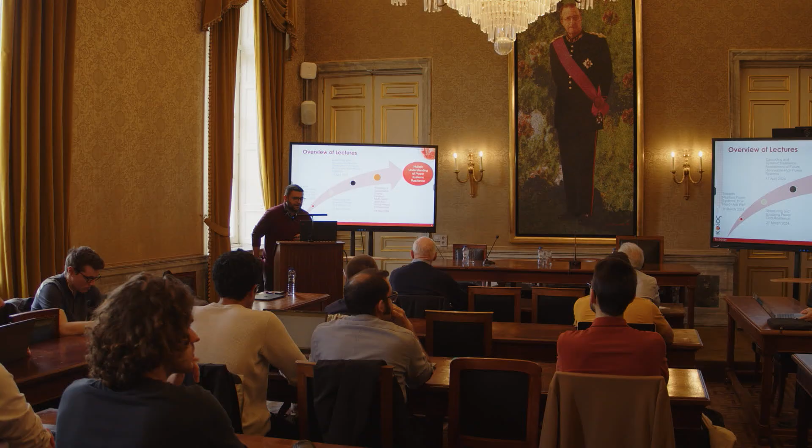So as Pierre said, we already delivered 3 lectures as part of this position. We started from March, where we talked about resilient power systems, then how we measure and enhance power grid resilience, cascading and dynamic studies, and this last lecture will focus on flexibility of sustainable systems. We'll see examples of multi-sector and multi-vector perspectives, and how everything is brought together under joint frameworks to co-optimize different energy vectors and different sectors together.

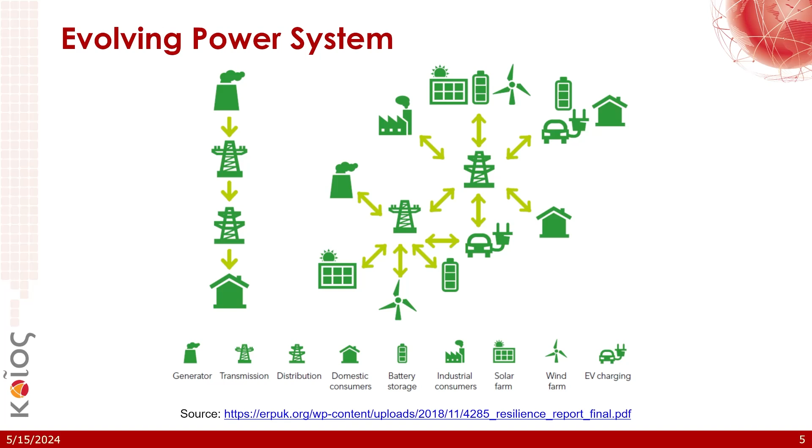So as we all know, the power system is evolving. Starting from the vertical structure that we had, from generation to consumption, now everything is getting more complex with the penetration of electric vehicles and renewable energy sources all over the place. So we see this kind of multi-directional and bi-directional flow in energy systems nowadays, and looking ahead in the future as well, the multi-sector and multi-vector perspective is becoming very important.

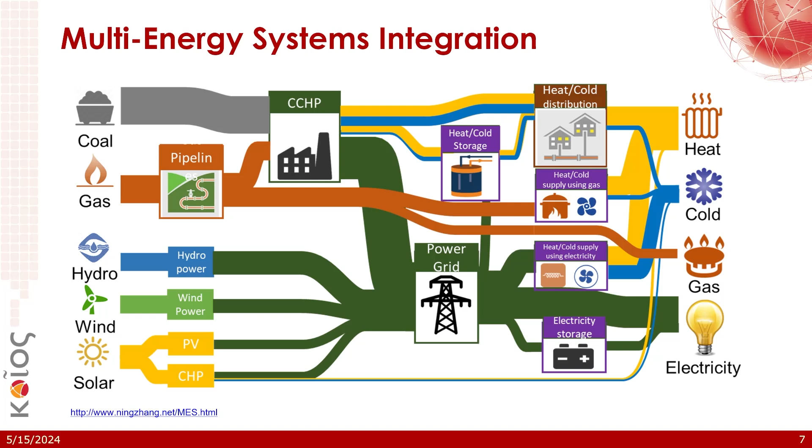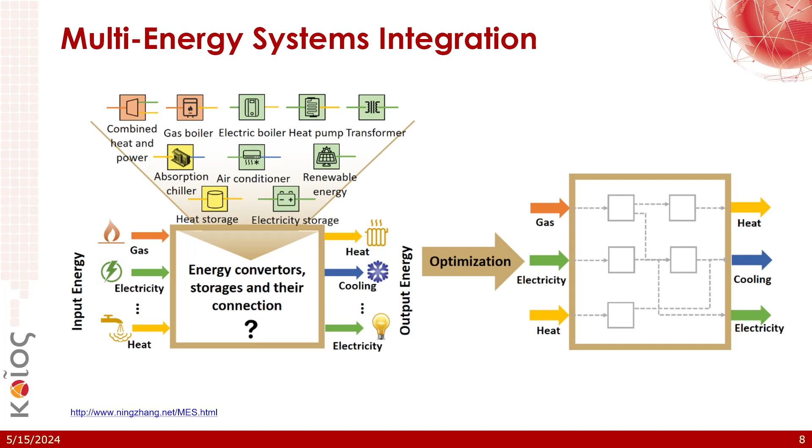So we have different technologies coming into the system. We have gas boilers, electric heat pumps, and so on. And the question is how we bring everything together and co-optimize these technologies and resources in order to provide the services that we need as a society, for example heating, cooling, electricity supply, and so on.

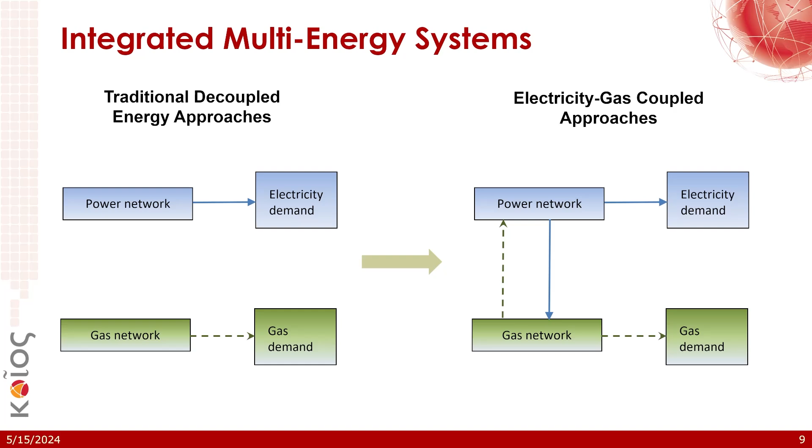Traditionally, we had the power network and the gas network, and those two systems were providing the electricity and gas demand in an independent manner. Now, with coupled approaches, we need to look into the interdependencies and the integration of the two systems together, as we can see in this simple diagram here.

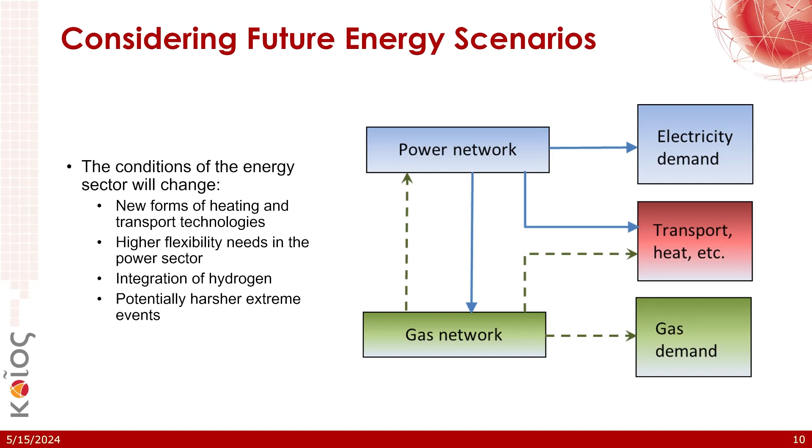And if we start adding more critical sectors, for example transportation and heating, as we consider future energy scenarios, then the whole complexity and integration becomes more and more critical. For example, National Grid in the UK has what they call future energy scenarios, where different energy carriers and low carbon technologies penetrate the system, which will be operated and have to be co-optimized in a holistic manner.

Further to the multi-energy perspective, we also have the multi-sector, and this is just basically an example of a multi-layer analysis where we need to define the coupling points between the critical sectors in order to assess basically their performance, their vulnerabilities in a coherent manner in order to co-optimize their performance in a multi-sector environment.

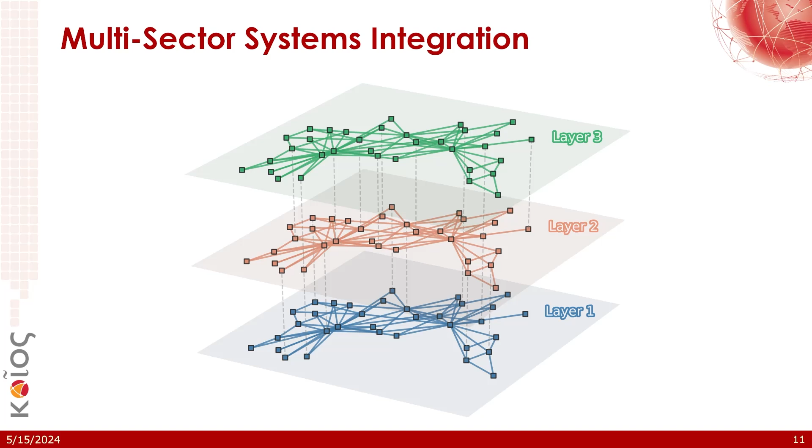When we started the project, the FutureDAMS project, which I will talk about later, we were doing our thing as electrical power engineers, and the water engineers were doing their part from the water side. So basically, as power system engineers, we assumed that we'd have plenty of water to use whenever we want for hydropower generation. And the water engineers from their side were putting their own constraints on the water that the electricity part will have for hydropower generation.

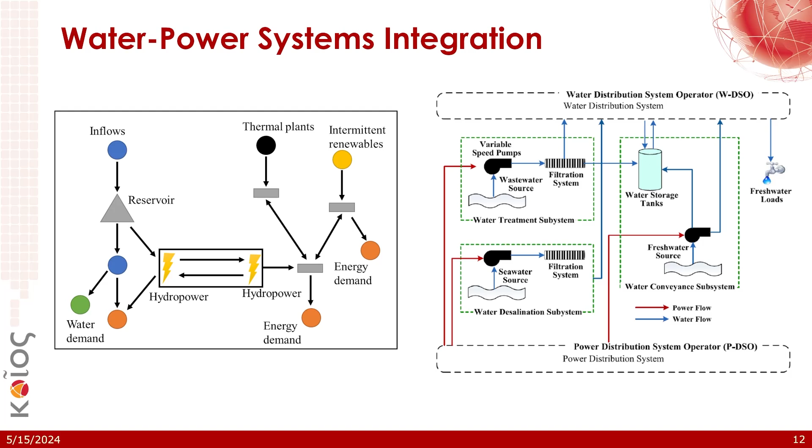So when we were actually trying to merge the two, we realized that it's not that simple. There were many complexities in coupling the tools, from the perspective of modeling each system. They run in different time resolution. For example, we assumed that once we open the valve in the reservoir, the water would go automatically in the generator and start producing electricity. The water engineers told us that's not the case. It takes some time. So that time difference is very important to consider if you want to achieve high accuracy in your results.

So, okay, this is something that we said already. So the first case study that I will talk about is the Manchester campus case study. This is a representation of the new campus of the University of Manchester. We were tasked by the dean of the university to see how we can co-optimize the energy resources we have in the campus. In the campus, the electricity, heat, and gas systems were operating independently. So we had our electricity, heat, and gas demand, and they were supplied in an independent manner.

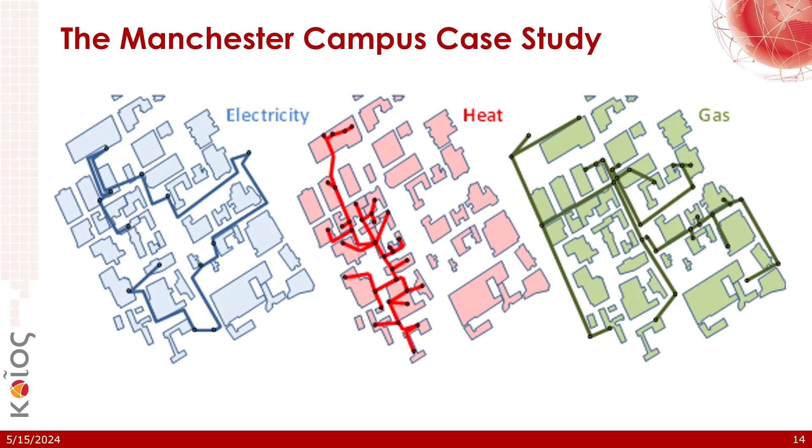So we were tasked to see how we can run this within a multi-energy environment and how we can achieve some savings in terms of some key indicators they gave us, which are basically the CO2 emissions, the cost reduction in energy consumption, and so on. So in a nutshell, the district of the university is comprised of 26 buildings owned by the university. Some of those buildings are connected to the same electricity distribution network, district heating network and gas network, but most were not.

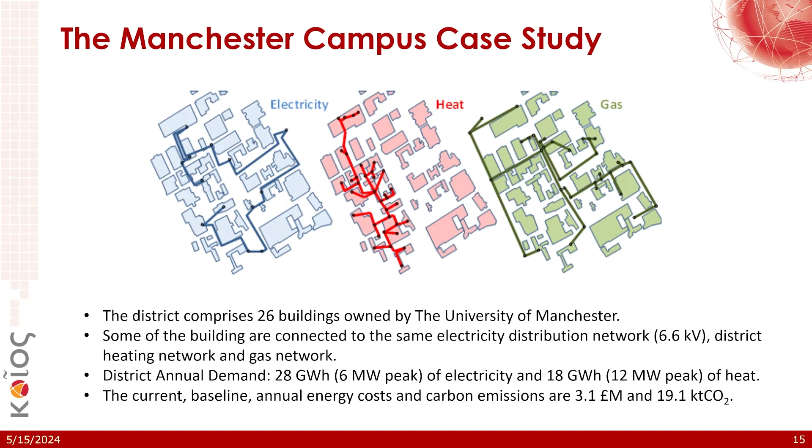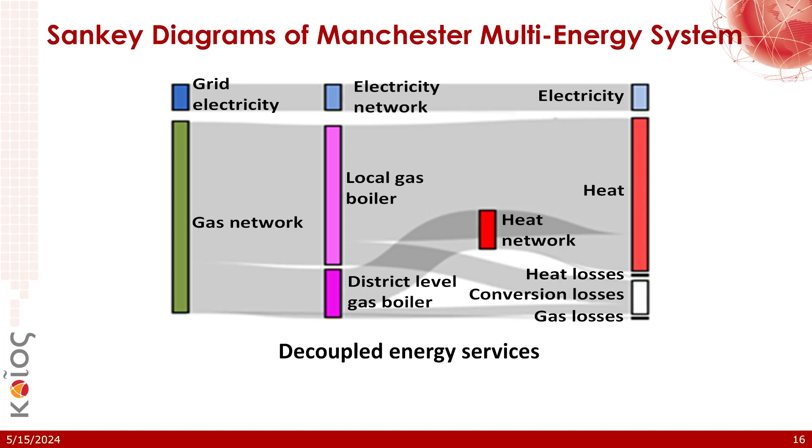These are just some characteristics about the district demand of electricity and heat. And we were given a baseline of the energy cost and carbon emissions to use as a benchmark within our analysis. So what we did first was the decoupled energy services. We looked at how the system behaves if we look at the electricity system and gas network independently to provide the services in the campus in terms of electricity and heat consumption. Then we simulated the boilers, both at the local and district level, to see their efficiency, and added the heat network, the heat losses, and so on under a common framework.

Then we started mixing things a bit. We started considering the ambient heat and how we can utilize that to operate our heat pumps, again at a local and district level. And afterwards we put the gas network into the simulation as well as a common framework. We then noticed that we can reduce a lot the grid electricity consumption. We can utilize more the gas supplies that we had, which is a cheaper option, at least in the UK, because gas is one of their primary electricity supplies.

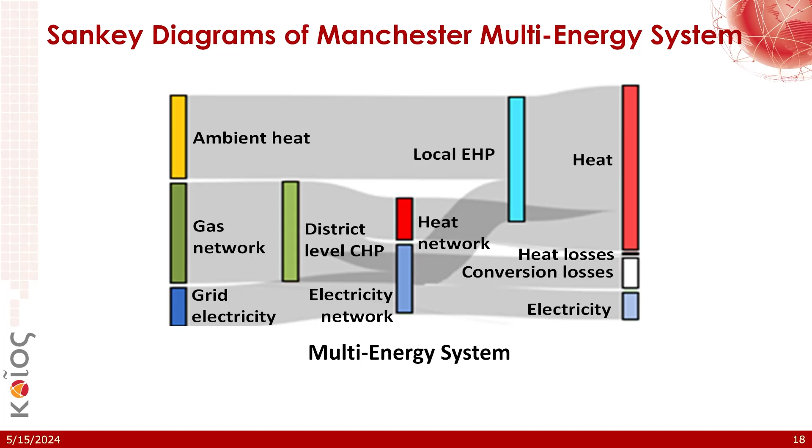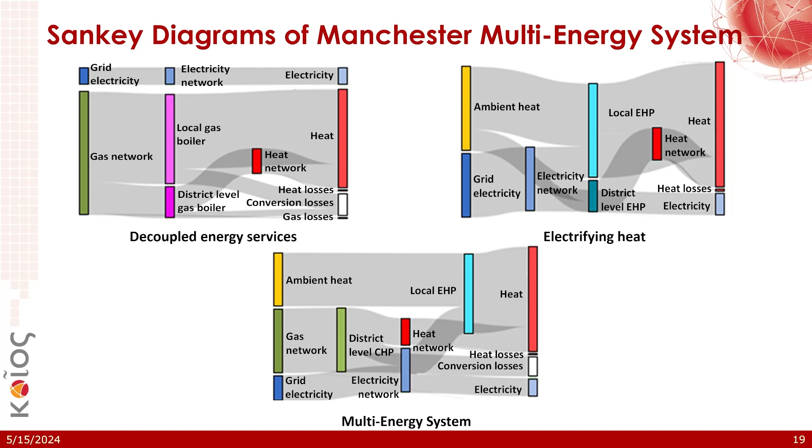And then we saw with these Sankey diagrams how, moving from the decoupled energy services into a multi-energy perspective, we can co-optimize and co-utilize the heat, gas and electricity vectors. Afterwards, we defined different scenarios, starting from the baseline, then moving into a conservative scenario where we kept the boilers steady. And then we tried to increase the PV, the electricity heat pumps, and the combined heat and power that we had in the system under 4 different scenarios.

We had the baseline, a conservative, a modest, and an extreme penetration of these low-carbon technologies. These scenarios were developed with the technical services from the university to see what is actually possible to do with the infrastructure we had in Manchester. So you see that we put a lot of PV as well, which was a bit funny to do in Manchester, considering the cloudy weather, but it actually worked.

So in this table here, we can see different indicators. We have the annual economic savings, the annual carbon savings, the peak demand reduction, and the electricity demand reduction. So this is the business as usual: continue operating the system as it was, but with these technologies for the different scenarios. But also what we did, we applied some smart control.

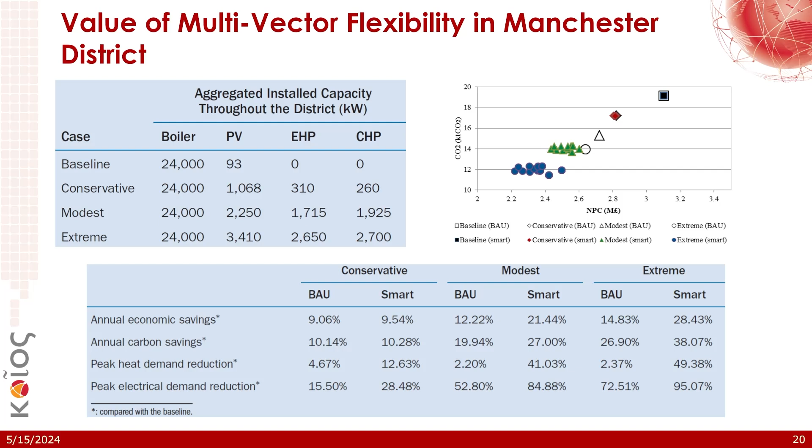So taking a closer look at this diagram, here we have the CO2 emissions and we have the cost in the x-axis. And here we see that even though with the extreme scenario the cost of investment is higher, the annual savings on the electricity and the heat consumption actually counterbalance the initial investment that you put in your assets. So although the extreme scenario was requesting more investment, if we consider the net present cost, it's actually not that expensive, over a long period of time, to return the investment that you put forward for the assets.

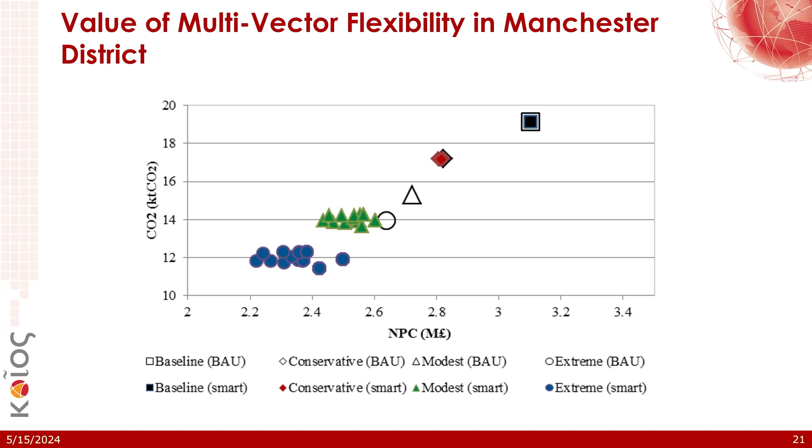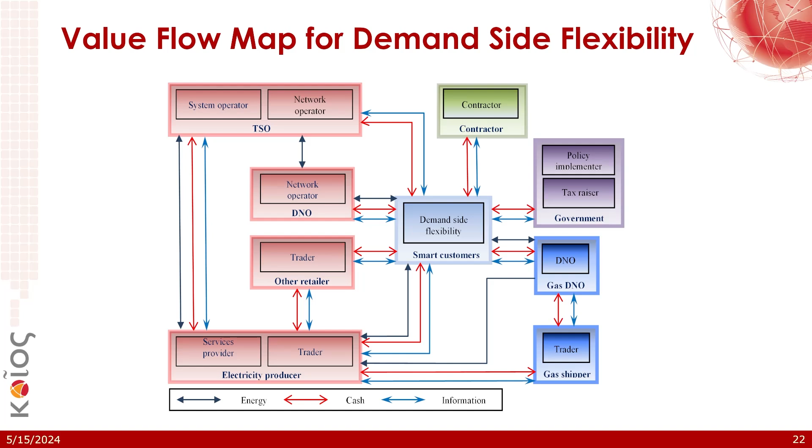So this is an example of a sort of multi-energy integration. So talking a bit about resilience, so Pierre will not have a complaint that we left resilience out.

In a piece of work that we did with some colleagues recently, we took this resilience trapezoid that we had in a previous publication of ours from 2017, which has three phases: we have a disturbance here, and then the progress of the disturbance, which reduces the performance of the network, whatever the network is. We have this period where you are trying to coordinate your emergency actions, and then we have the restoration of the system back to its initial state, or there are some discussions that after a disturbance you can go into a better and more secure state with the appropriate actions.

So the question that we asked with some colleagues in a publication we had last year is how a disturbance from one energy vector can escalate or propagate to another. So we created this conceptual framework where we had the resilience trapezoid for the electricity network, heating network, as well as gas network. And then we came up with a conceptual framework to see how, as I mentioned, a failure can propagate from one energy sector to another.

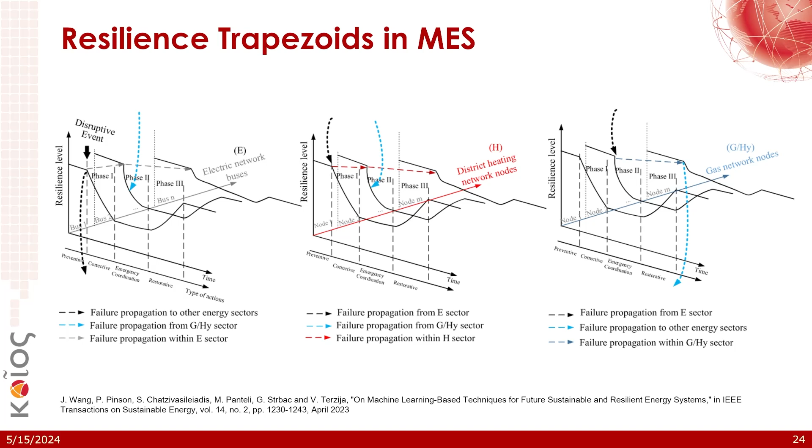The trapezoid, I'm very much aware that it's not really a trapezoid. When we first worked on this, what I wanted to achieve is to have a simple way of showing what might happen when you have a disturbance. When you look into real data, first of all, this period is not that long, but I wanted to have a nice shape to be explanatory.

What we do in different projects, you are very correct. When you want to do dynamic studies, for example dynamic stability, you have the drop, and then you immediately go back to service, as you said, with batteries, with quick injection of energy, you can recover much faster. We do that, and that was a topic of the previous lecture, but I can share the slides. Yeah. Thank you.

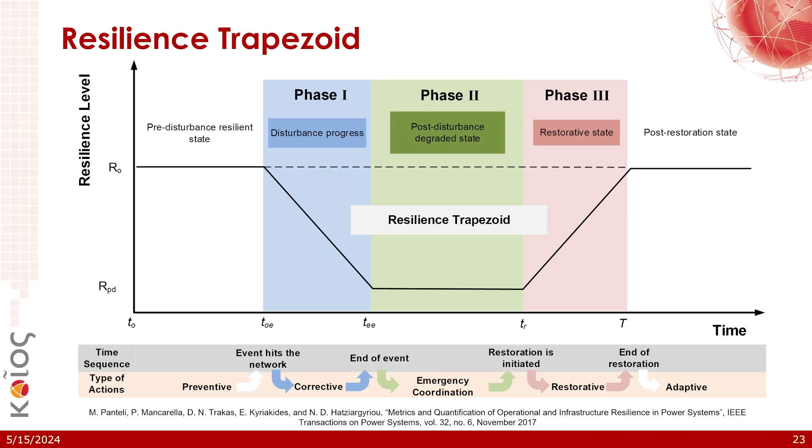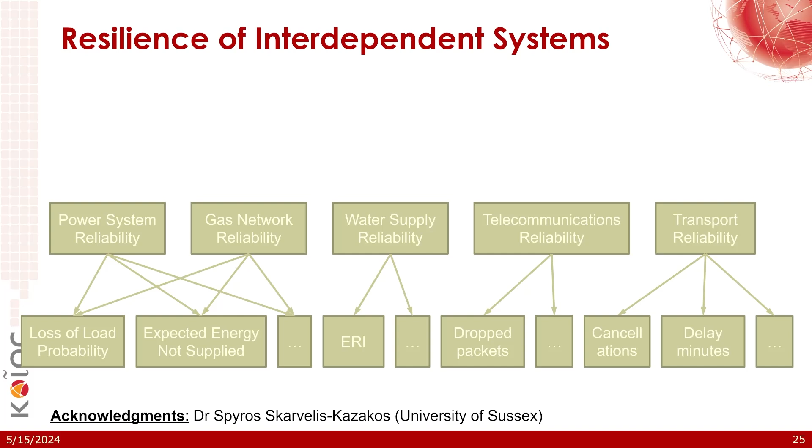So, on this topic, when we're talking about resilience of interdependent systems, we have all the suppliers, and as we're saying with Hakan now, we have different metrics as well that different networks are using. So when you are adding resilience as well in the picture, we need to define power and gas metrics, water metrics, transportation, telecommunication metrics, and the question there is how you can actually try to compare or to come up with a common metric system that will be acceptable from the respective operators and regulatory authorities.

In the UK, that I'm still working a lot with, we have discussions with Ofgem and with Ofwat, which are basically the electricity and gas and water regulators. And we had also IGEM, the Institution of Gas Engineers and Managers, and National Grid as well, where we're trying to build the electricity and gas equivalent network of the UK and try to expose that network to different kinds of disturbances, which was basically inspired from the unfortunate example of Texas. And they were worried that if a big gas disturbance happened in the UK, what would happen in the electricity sector?

And also with the water system, Ofwat were very interested to see how the water consumption of big thermal power plants will change under the impact of climate change, and looking into climate resilience, how much water the electricity sector will need, and how much the water licenses that the electricity authority will have to pay will change as a function of the water scarcity that is expected as an impact of climate change.

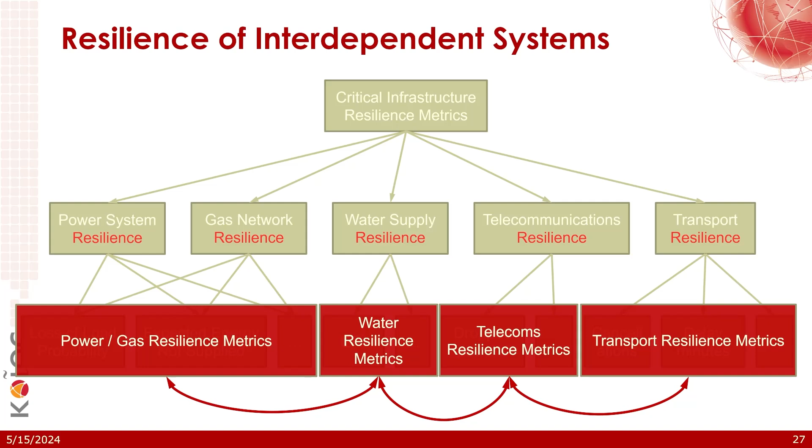So looking into this kind of interdependent side of critical infrastructures, in Manchester we started this FutureDAMS project in 2018, which was looking into the design assessment of water, energy, food, environment megasystems.

So there is a video. There is sound as well. Good. So I will let the video explain what the project is.

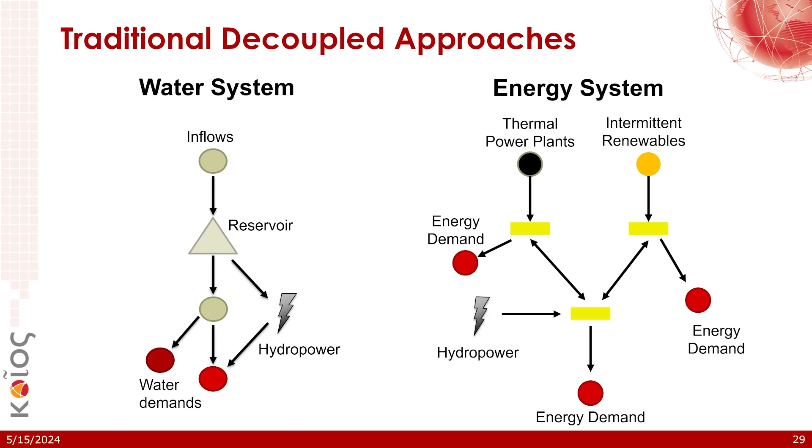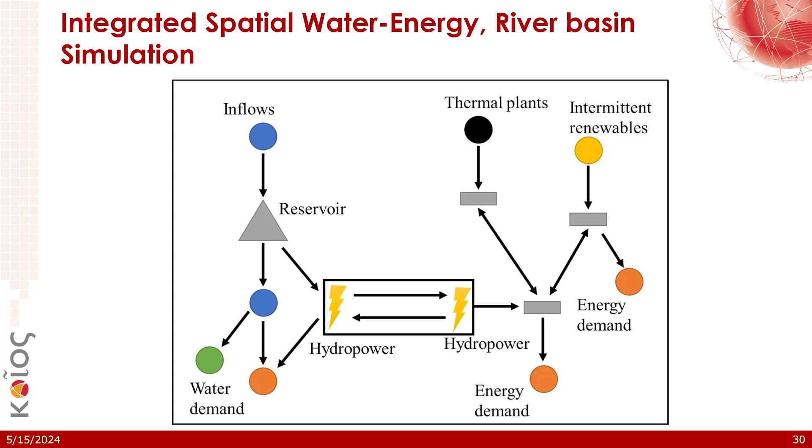So as I said earlier, within the project we had water, power, and environmental engineers as well. The water engineers were just operating the river basin models that they had in their own manner, and they were doing a simple transportation model to see how much hydropower can be generated. And from our side as well, we started by utilizing all the water that we had on the rivers in these countries to generate hydropower. But the two are actually connected. And we tried to see how we can bring together the water and the energy modeling into a single platform.

So in this project, we had our energy model and our water model, which are openly and publicly available on GitHub, Pywr. And we also developed a communication engine, Pynsim, which was responsible for linking the two engines together. And then we had different water inputs, water energy, weather data, modeling settings, and we also had the generation cooling, which was requiring some water from the river basin to operate.

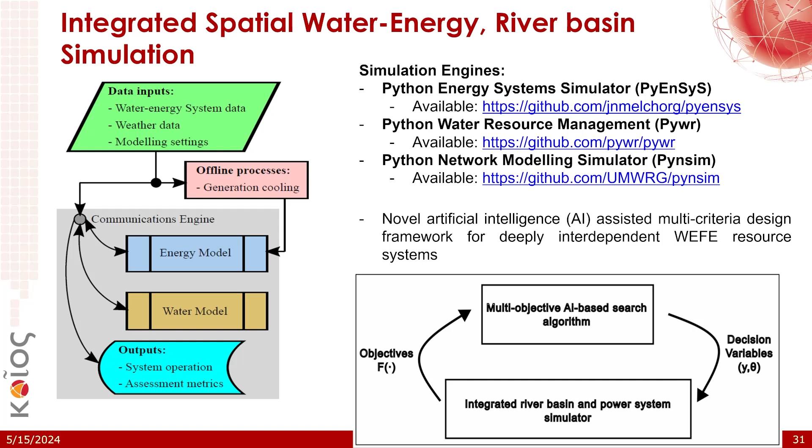So we brought all this together under an AI model for a multi-criterion design framework, looking at WEFE, water, energy, food, environment resource systems, in order to see how the different trade-offs work between the critical infrastructures. So this is how it works. First we're doing the water power network simulation.

So we're having the systems modeled together. So we started with a bit of soft coupling. So the water team was modeling the water system, we were modeling our energy system, and then we had this kind of soft coupling and soft communication between the two models. Then we had one platform, one model for running both together with the spatial and temporal resolution that we're defining.

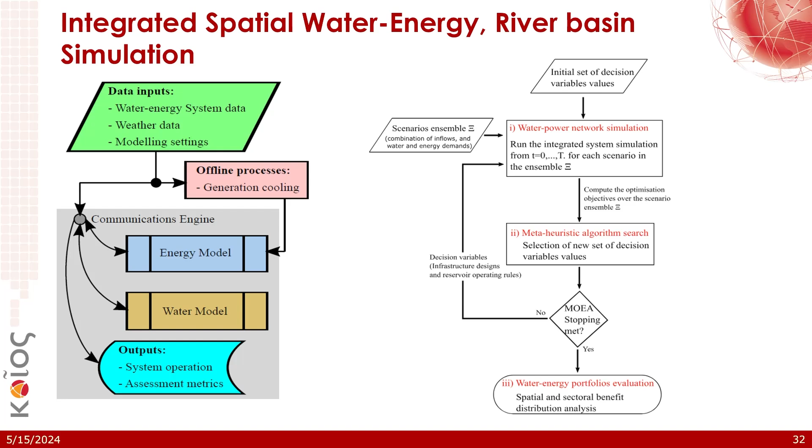And then as a first approach, we used metaheuristics to select the variables, and then this was continued until we reached the water-energy portfolios evaluation, achieving spatial and sectoral benefits for both systems. Okay, this is just a simple system which I will skip, for the sake of time, to go to the nice example that we did for Ghana.

So for Ghana, we had the water and the power utilities as partners within the project. So they gave us some tasks in order to achieve large-scale development and penetration of renewables in the system, supported by the Akosombo Dam, which is in the south of the country, which is the largest installed generation plant with a capacity of about 1 gigawatt.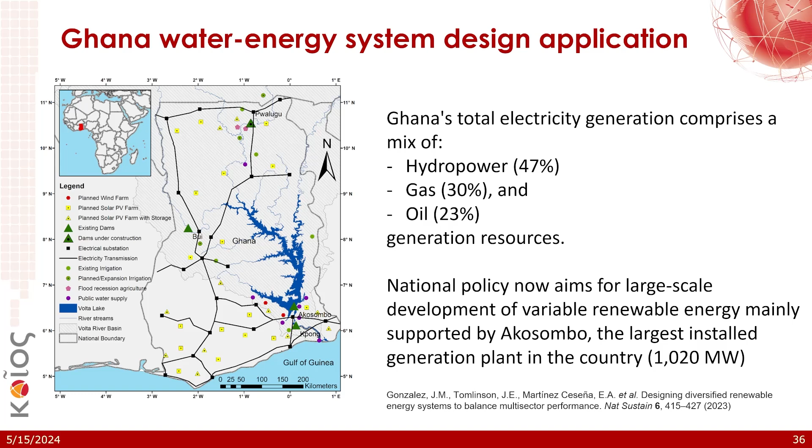So the generation portfolio of the country was something like this: about 50% hydro, 30% gas, 23% oil. And then we tried to see how we can penetrate more and more renewables into the system. So this is the equivalent network we built for Ghana, which is currently being utilized by the utilities there, where you can see wind farms, solar, dams, electricity, water system, and so on, everything in one model.

So looking into the design challenges that we had, we needed to meet the future energy demands of the country as it was evolving, reduce the emissions, minimize the hydroecological disruption, and no new dams. Which meant that we needed to rethink the way that they were operating their hydropower in the country.

And the no new dams constraint was because, as Khadija does, in optimization, the portfolio might say, okay, build a new dam. But a new dam, as we realized very soon in the project, is not a simple case, because a new hydropower station has a lot of environmental impacts. So we had different objectives to minimize, and those objectives were spanning across different sectors.

The decision variables we had were adding more renewables, solar, wind, and also biogas as dispatchable renewable generation, which they had plenty of resources for in the country, building new transmission, and, as I said, rethinking the reservoir operation. And then we had different intervention scenarios: just updating the operating rules of hydropower, updating the rules plus transmission line expansion, and then plus adding some bioenergy in the country.

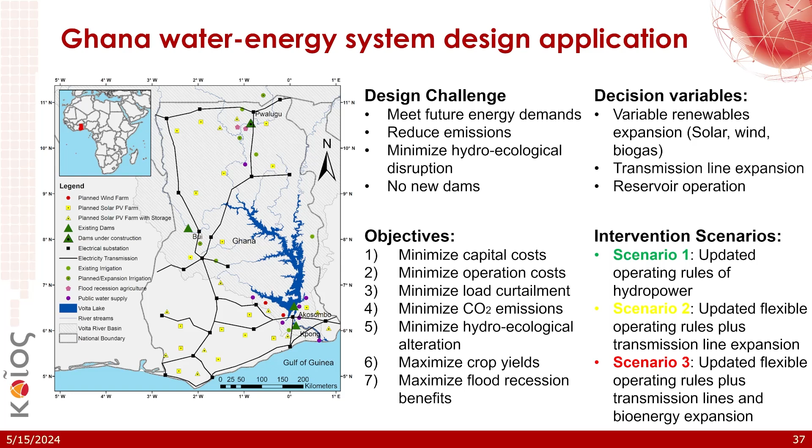It's not a mathematical thing. Yeah, and I will talk about the trade-off issue. I will address it later, yes.

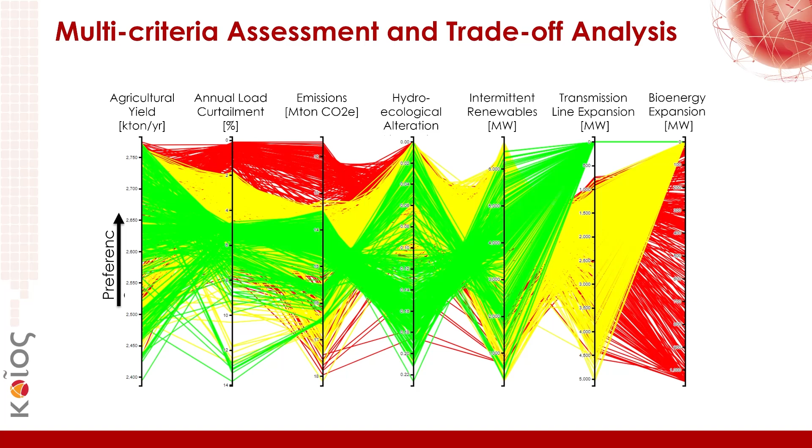So what we did in the first meeting we had with the Ghanaian authorities, as academics, we went there and we said this is the optimal solution for the country. And then because there were different kinds of engineers and authorities in the room, they told us, okay, what if you consider the crop yield? What if you consider, as Juan said, the impact of hydro-ecological alteration and so on? So it was difficult, using these objectives and these decision variables, to actually come up with one portfolio.

So what we did, we defined hundreds of portfolios, where each line actually represents an investment portfolio for Ghana. So we used this kind of parallel plot diagram for the utilities of the country. And for each scenario, we have this metric and we're showing how it behaves and how it affects the different sectors in the country.

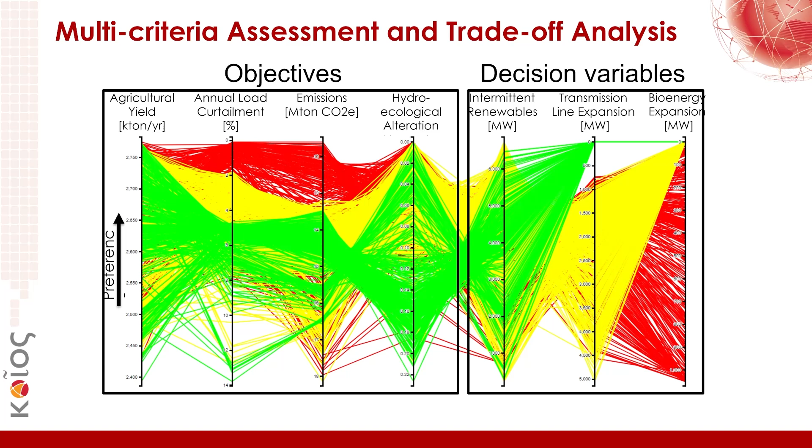So once you do that, as we've seen in the video earlier, and you start putting filters on how much, for example, transmission line expansion you want, or can afford, or can build because of environmental reasons, then you can start seeing how the different metrics behave. So if, let's say, we put a filter there that we don't want any transmission line expansion, then we can see that the hydro was just supporting the base load.

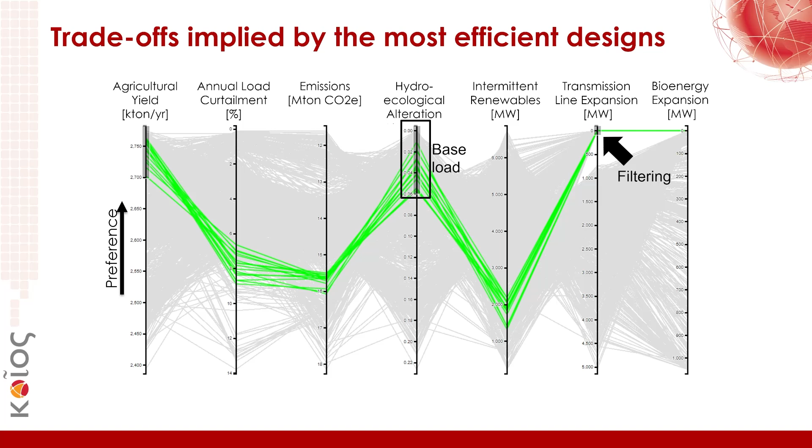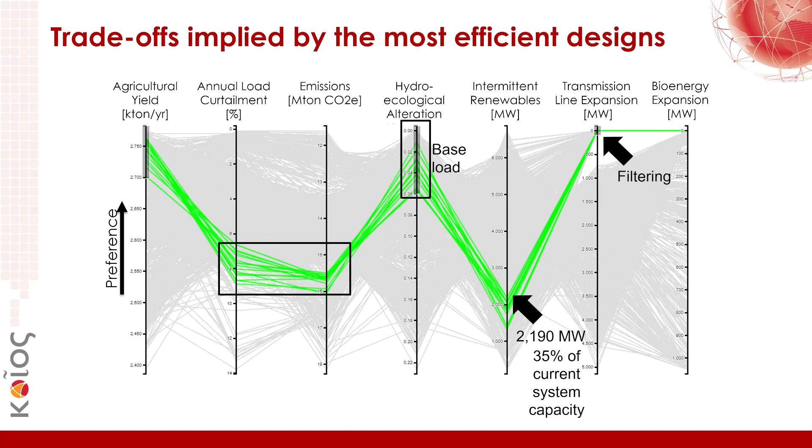The renewables penetration was reduced, because the higher we go in this diagram, as we said, is the preference. So the higher we are, the better. And we're also not doing very well in terms of load curtailment and emissions in the country. If you do hydro peaking, so hydro peaking is basically not just operating your hydro generation for base load, but you actually do the balancing for renewables.

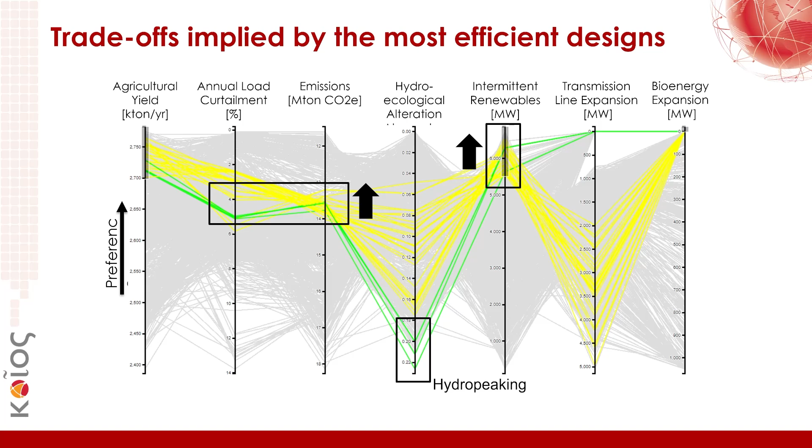We can see that the renewables are increasing a lot, but when you do the hydro peaking, you have a big impact on your hydro, on your water metrics. So you actually have a lot of impact on your water consumption, but because of the penetration of new renewables, the emissions are improved, and the load curtailment is improved as well.

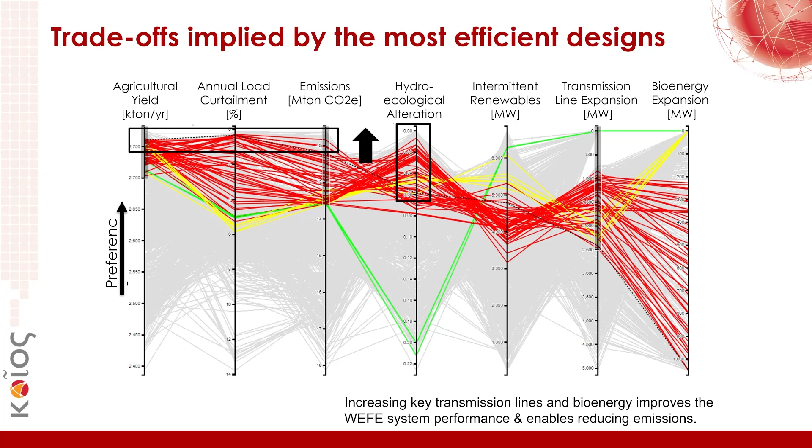Then you start playing with different filters here. So for example, if you build a new transmission network, then you reduce the environmental impact here, and you also optimize in a way the metrics for the other sectors as well.

So to provide, let's say, a solution for the country, because we were asked to provide a solution, we came up with what we called a compromise solution, not an optimal solution, but a compromise between the different sectors that we had in the country. So what we see here is the portfolio for the compromise solution, which was building some new transmission corridors between the different regions of the country.

And then we have how different energy technologies will penetrate in the country, from solar PV, some storage, wind, biogas, and also the transmission system. So this compromise solution achieves low cross-region transmission expansion and higher expansion in the southern part of the country, because the big hydropower stations are in the south, to achieve the hydro peaking and balancing, and also higher biogas penetration in the north where the resources were more available.

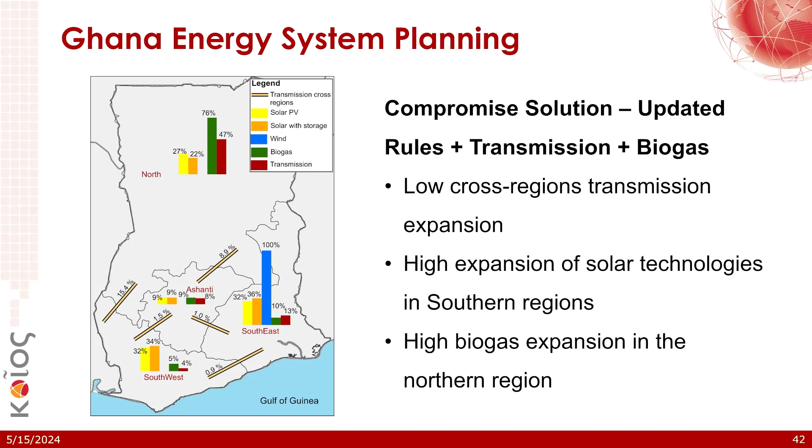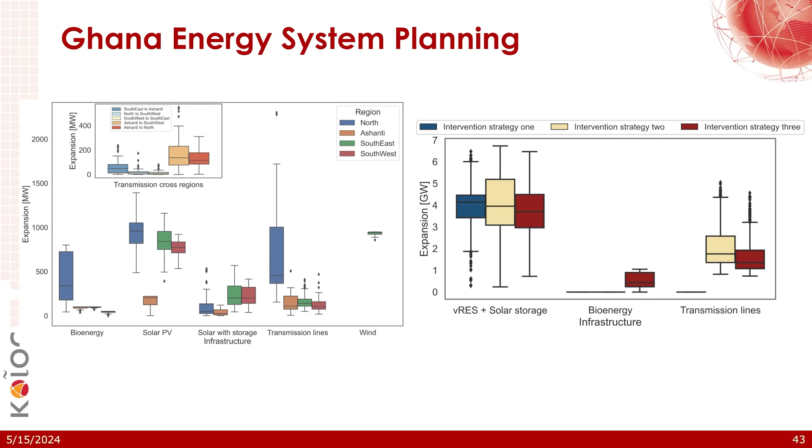And these diagrams show with box plots how the different technologies penetrate in the different regions. And actually these results informed the strategic energy plan of Ghana, looking 10 and 20 years ahead for their strategic energy design. Okay, these are just some other results.

So the other case study we had was for the Nile Basin, as we said earlier. So we built, as you can see here, the integrated water-energy network of the whole Nile Basin. We have this model, and this work was published recently in Nature Water. I think it was last month. So it's a very nice piece of work, and I think the model is already available on GitHub to be used.

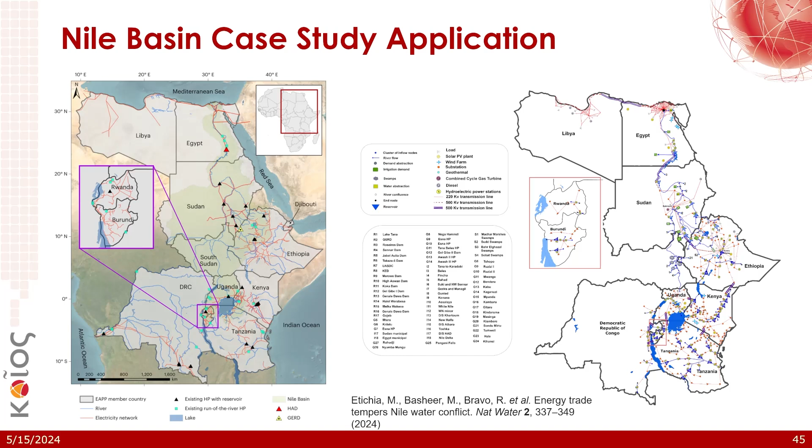So we simulated all the energy and water systems from Tanzania all the way up to Egypt. So it has all the technologies, both from the water and the energy side, in one common simulation model. So as the colleague just said, how trading works in these complex systems is pretty much a political topic. So what we addressed in this paper, there was this new dam built in Ethiopia, the GERD, the Grand Ethiopian Renaissance Dam. Yes, thank you again.

So basically, there was what they called the Washington Draft Proposal that allowed trading only between Ethiopia and Sudan from that new dam, and no trading between Ethiopia and Egypt. When we went into forums with all the system operators and ministries about this matter, their concern, of course, was if you use a lot of water upstream in Ethiopia, how it affects the water flow downstream in Egypt.

And there was a lot of heat in those meetings. So we tried to see if energy trading can actually help solve these kinds of river basin conflicts, in order to share the benefits of that big dam across the countries on the Nile Basin.

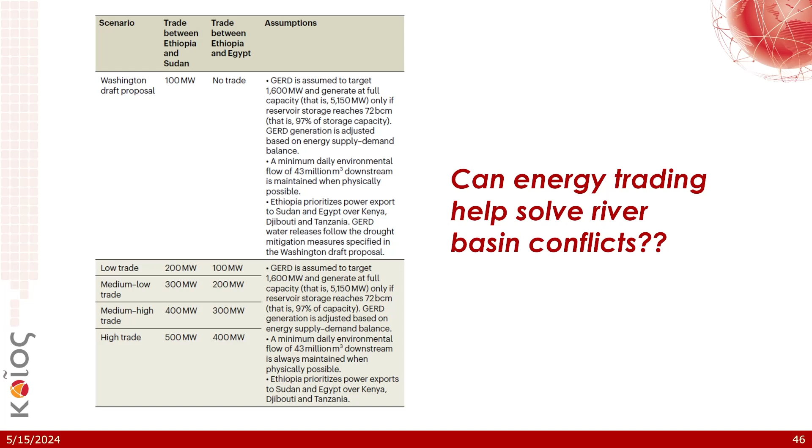So we defined different scenarios here. We had the low trade, medium to low, medium high, and high trade, increasing by 100 megawatts each trading scenario compared to the Washington Draft Proposal. The Washington Draft Proposal was something coming from the United States to propose how the GERD water releases should be used. So we took that Washington Draft Proposal and increased it gradually by 100 megawatts, as you can see here, starting with 100 megawatts, 200, 300, and so on, to see how this affects the energy trading and the water resources in the region.

We tried to see under different trading scenarios how the energy and the water resources and deficits change for the countries. So we tried to give a kind of proof of concept, if you like: if you use in different ways the new dam that was built in Ethiopia, how that affects the resilient performance of both water and electricity systems for these big countries of the region.

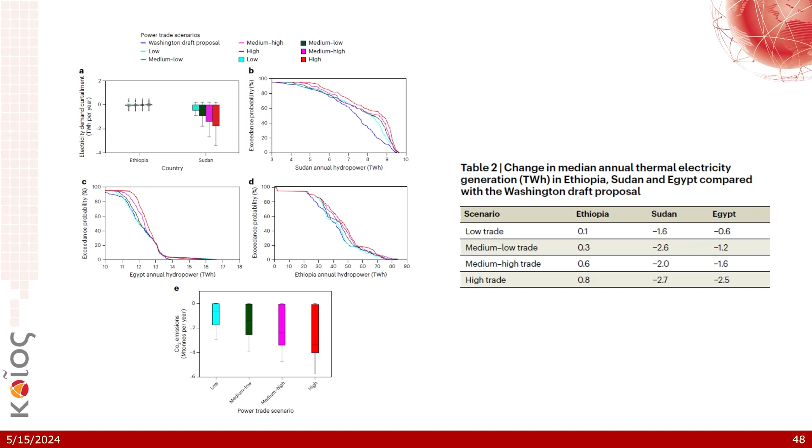What we also did, because coupling the water and energy systems is quite complex and depends on many assumptions, we tried to see how those modeling assumptions can affect the performance of the model. So we considered different sensitivities to water availability, RES integration, power network stress, temperatures, as well as including or not including different factors in our model. By different factors, we mean if we have unit commitment for the power system, if we have the losses, if we have the hydraulic routing of the water system, which affects a lot the performance of the power system itself, and so on.

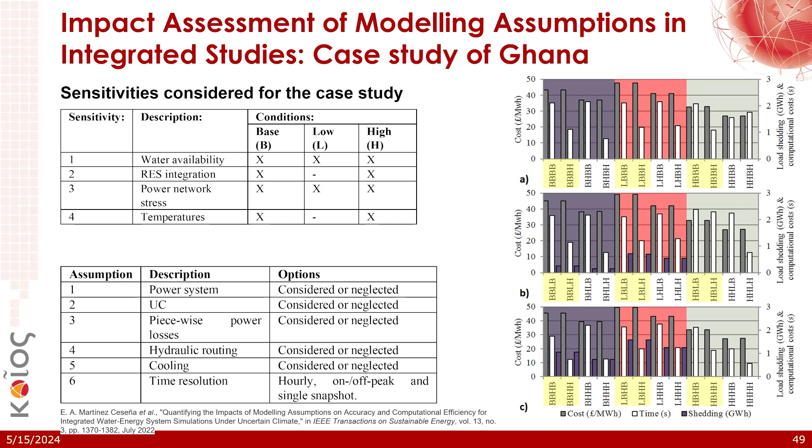And then we came up with different metrics for the cost of electricity and water consumption, as well as reliability metrics for load shedding and computational cost under the different assumptions that we had. So we tested our models thoroughly under different modeling assumptions for both systems.

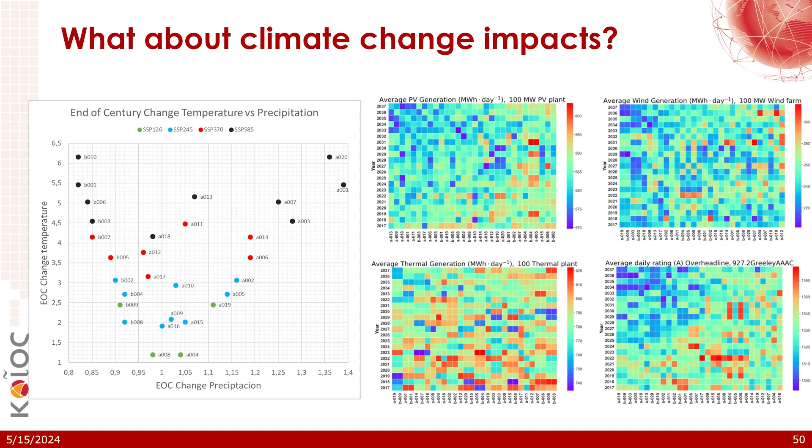And the overhead system is very important because, I'm sure some of the colleagues here might be from those regions, the temperatures can get very high. When I visited the Emirates, it was in August, which was a very poor decision, to visit Dubai and Abu Dhabi in August. You could see the transmission lines actually sagged very much, getting down to the distribution level height. So we quantified the impact of climate change, different temperatures, water availability, and so on, on the resilient performance of PV, wind, thermal, and overhead line ratings.

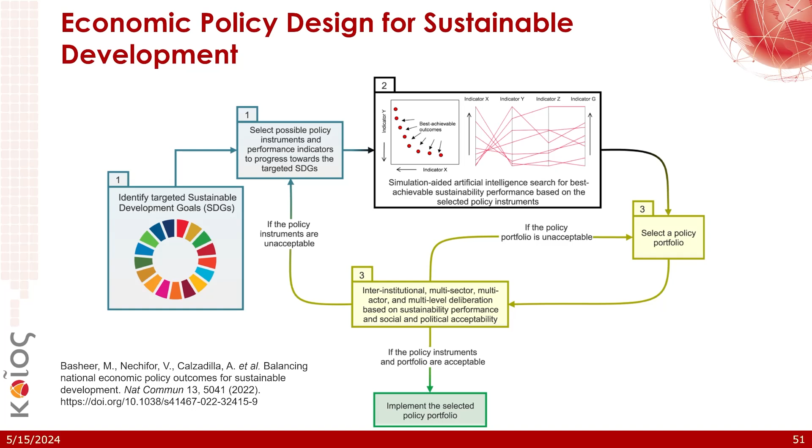And what some other colleagues did in the project, which I was not involved directly in, is to develop what we call the economic policy for sustainable development. They identified the sustainable development goals for the different countries, and then tried to see how the different policies they have in place can interact within this multi-sector and multi-actor environment of river basin infrastructures in Africa. This is a very nice article in Nature Communications, if you're more interested in the policy aspect of this work.

And of course, if you want to learn more, you can visit the website, where you can see different articles, position papers, as well as different training platforms that we used for the African partners.

How am I doing with time, Pierre?

Very good. Okay, so. Can I ask a quick question about the GERD study that you did? Yes. So what was actually the effect of the increased trades on the water volumes that could be released? Because at least from what I understand, the concern is that not enough water will be released downstream, and that somewhat the increase in trades facilitated that also more water was actually released.

Yeah. So what we noticed is that the water deficit, of course, was increasing, not dramatically, but it was increasing, which Egypt was not very happy about. But if you consider the energy trading, my argument to that is that there is no market yet in the region. I think, if I'm not mistaken, there is a market in the Southern Africa part, a power pool, as they call it, but not in the East Africa power pool. So in order to do this kind of energy trading, you need a market. You need to give a price to what you are trading.

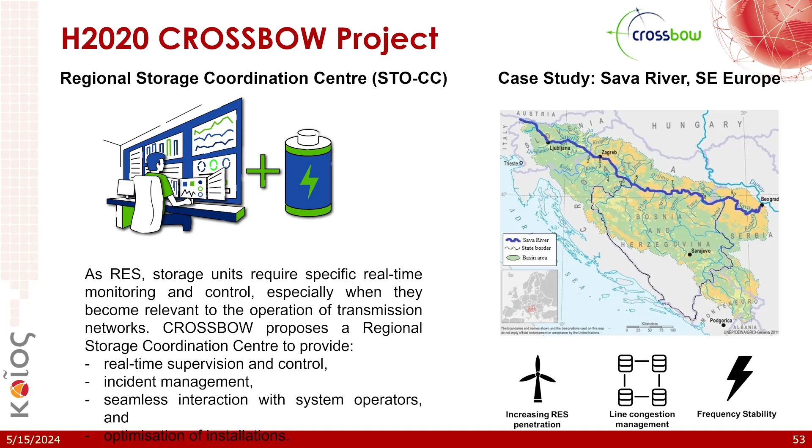Okay, so very briefly, some relevant work about this kind of hydropower optimization is work we did for the Crossbow project, which is a Horizon 2020 project. Within this project, we were tasked to build a regional storage coordination center. For this part, we looked into the Serbia-Bulgaria interconnected network, in the Balkan area in southeastern Europe. The center would sit in the coordination center in Belgrade, to provide increasing penetration of renewables, solve congestion management, and also provide frequency stability for the countries.

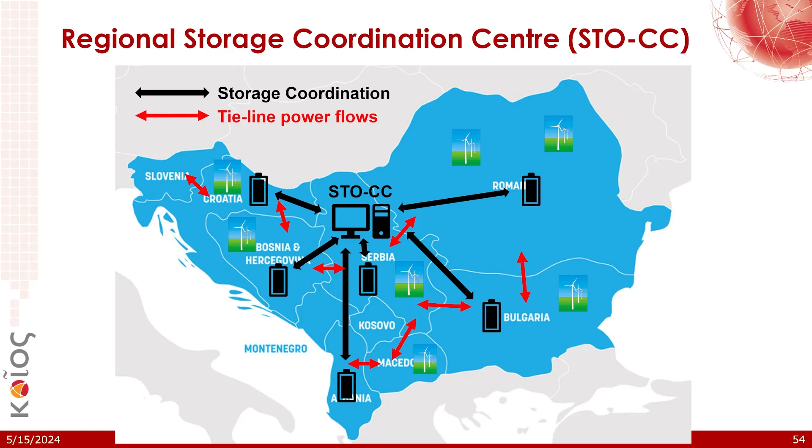So as I mentioned, the idea is to have this storage coordination center in Serbia, which will try to co-optimize the renewable penetration in the Balkans, in the southeastern European countries. So the idea is, if you have dispersed storage in all the countries, how this storage can be coordinated using the tie line power flows in order to improve the renewable penetration in the region. So this is how it looked.

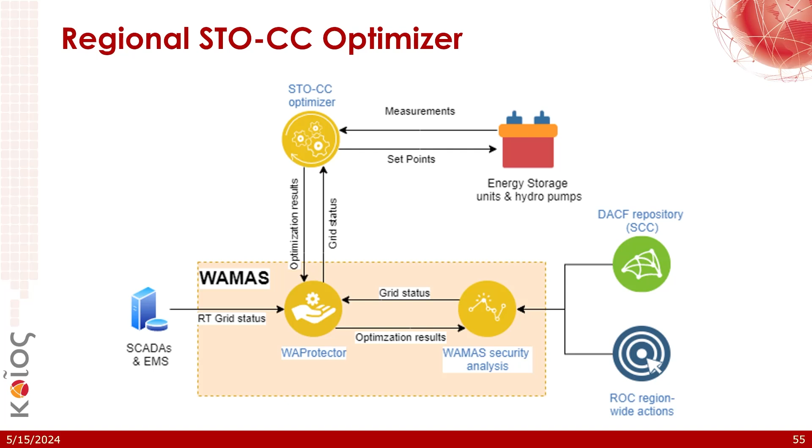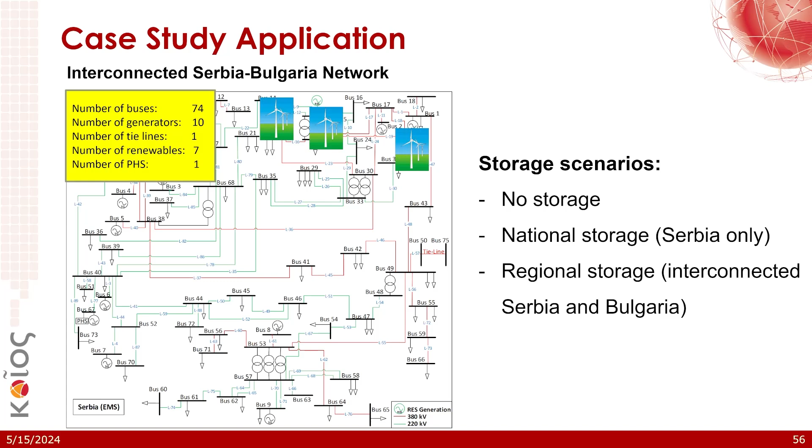The idea is to have the measurements coming from the energy storage units, the hydro pumps, into the optimizer, which was also utilizing wide area measurements in order to come up with a security analysis and to return the grid status to the optimizer to send back the set points to the storage units and the hydro pumps in the region. So we considered the interconnected Serbia and Bulgaria system, and we used different storage scenarios: no storage, national storage only in Serbia, as well as regional storage in the interconnected Serbian and Bulgarian network. And we assumed some wind in the northern part of Serbia.

So what we did at the end of the project, because we had to show a demo, we were receiving close to real-time data in our Manchester server. And then we were returning set points to a big hydro pump station in Serbia. We were hoping that they were going to take actions based on those set points. But they were just confirming that they were receiving the set points in their control center and not doing anything, because, of course, they couldn't interrupt the operation of the largest hydropower station in Serbia.

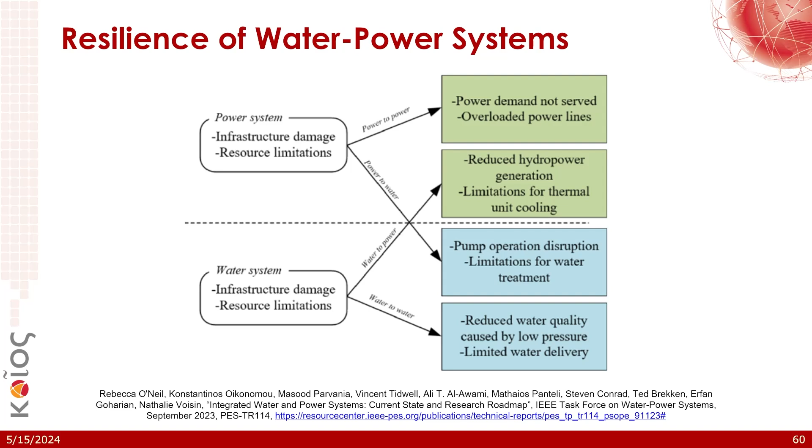So what we also did with some colleagues from the University of Utah within this task force, we tried to see how we can actually do a kind of coordinated recovery of the interdependent water and power distribution systems. So we built a couple of models of power and water looking at the distribution level now. So we had basically the power distribution system where we simulated different disturbances and different parts of the system. And then we try to see how we can minimize the outage propagation in the water distribution system.

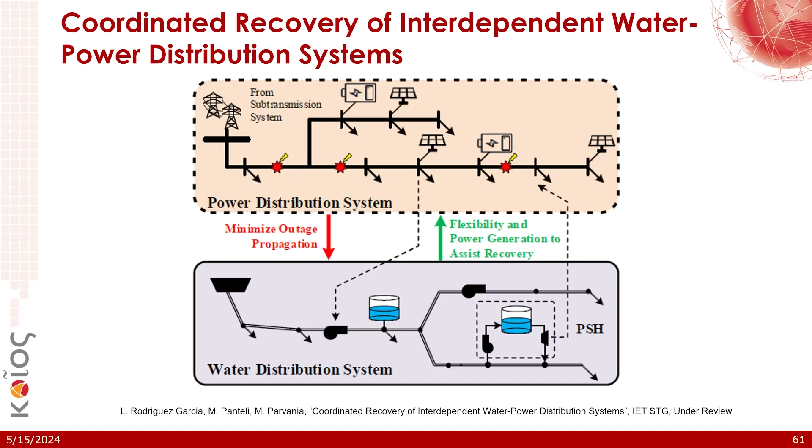And then, on the other hand, we try to see how we can treat the water demand as flexible and controllable demand to support the electricity distribution system. So this is how it worked basically. So we had the power distribution system with power demand, storage, line repairs, line outages, the water distribution system. And we had basically this kind of framework, as I said, about the coordinated recovery following a disturbance.

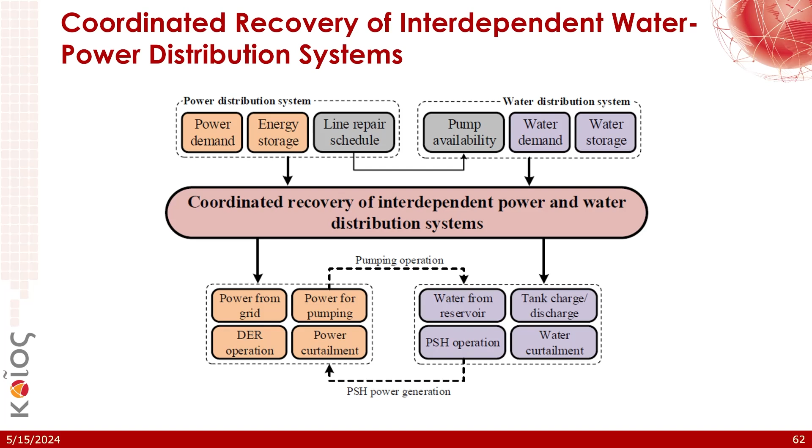Yes? When you say water power, you are limiting the thing on the hydropower or the heat pumps? Sorry, what? We have the ocean power. We have the waves power. Yes. It is water. Yes. So we don't put this in this terminology. You use only water power from the hydropower. Yes. Also, you don't use from the nuclear. Nuclear, no. No. You use water. Yes, you use, yes, but we didn't touch upon that, no. So it's only for hydro?

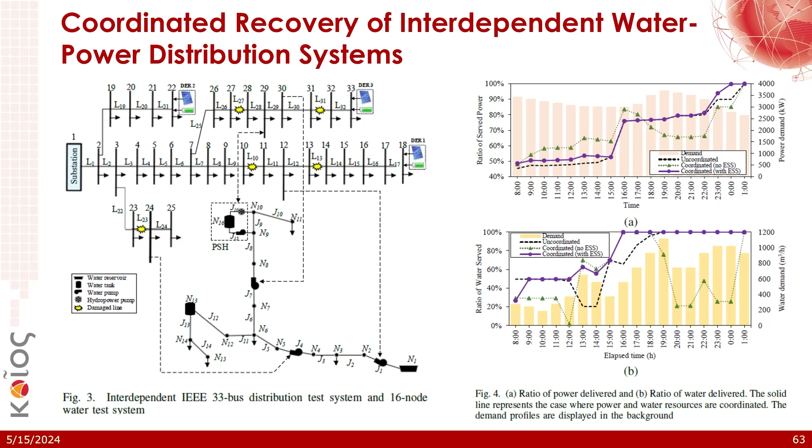So what we're doing now, as I mentioned, with the colleagues from the water engineering school from Israel, we're trying to basically develop different communication approaches for the water and power systems. So we have the power distribution system, we have the water distribution system. We have different events, so we activate basically the emergency control for the two systems.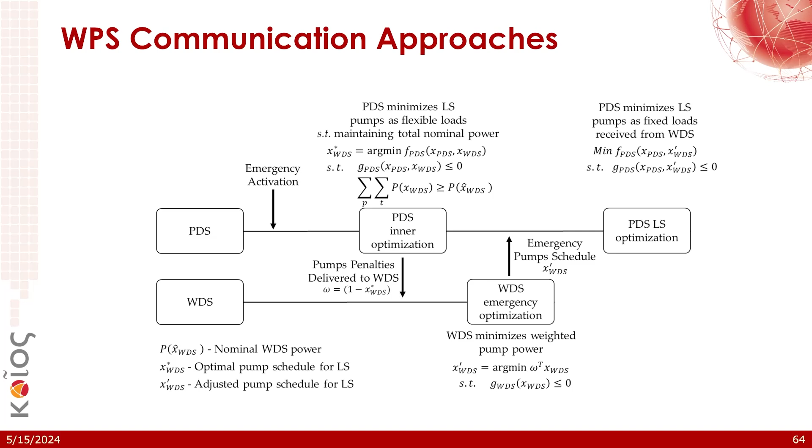And then what we do first is the inner optimization from the power side. So we put these pump penalties from the water colleague, which are basically constraints to the water distribution system. So we put the constraints, then they minimize their pump power as much as they can. So they return basically the emergency pump schedule back to the electricity system in order to come up with, let's say, an optimization and as much as possible reduction of the load shedding in the electricity system. So again, we're facing basically the water distribution system as a big flexible demand for the electricity infrastructure.

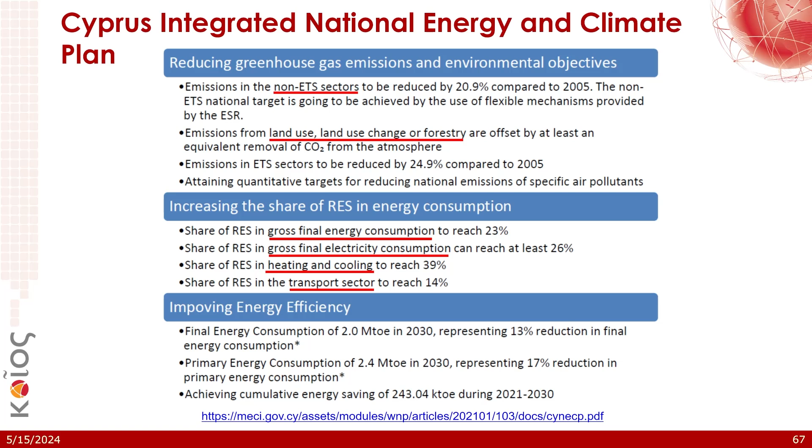Okay, so just to conclude, looking at our national energy and climate plan in Cyprus. I just wanted to highlight that the European Commission is calling for this kind of multi-energy and multi-sector coordination, moving ahead to achieving our carbon targets. So they are talking about electricity, heating, cooling, transportation, and so on, in order to reduce the carbon emissions in the country. And keep in mind that Cyprus for the time being is isolated, so reaching those targets is very challenging. Now we're being interconnected with Greece, with Crete, and the plan was to interconnect with Israel as well, but that plan, for obvious reasons, is put a bit on hold now. But we're hoping to make things easier when we're interconnected. But reaching those targets is quite challenging for Cyprus.

Of course, the key messages from the report that we submitted to the European Commission, which had a lot of comments, are increasing the penetration of renewables, energy efficiency and reduction of emissions, and also looking at human-oriented and community-centric approaches as we move on. It's the known concept of energy communities, basically. So there are many challenges that we have on the island: whether we understand the risks of increasing penetration of renewables, whether there is adequate coordination between the different sectors, between the different ministries, and so on.

And we define as an academic community different requirements moving forward for Cyprus, including new tools and more cross-sectoral approaches, because at the time being we're doing everything quite independently, and also to understand better what different scenarios mean from the perspective of socio-economic benefits for the island.